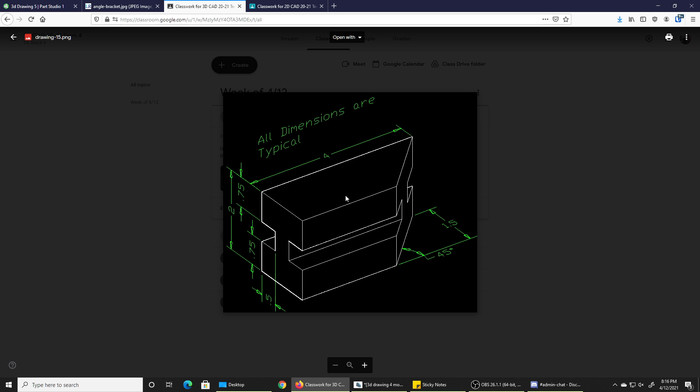All right, this is going to be drawing number 5 in 3D CAD. And you ought to remember it from 2D CAD. We all did it there. And it's not so hard in 3D as you might suspect, given the difficult time some of you had drawing this in 2D. So what I'm going to start with is a basic 4 by 1.5 rectangle, and then we're going to extrude it to 2 so we get that height.

Now I'm going to show you another trick. If I come over here and I start a sketch and it asks for a plane, I'll pick the top plane. I can use this button here to insert an image, and I can go import, and it opens up and it says, okay, where's the image you're trying to import. Once you do, it'll show up in this list, and there's the drawing I'm looking for.

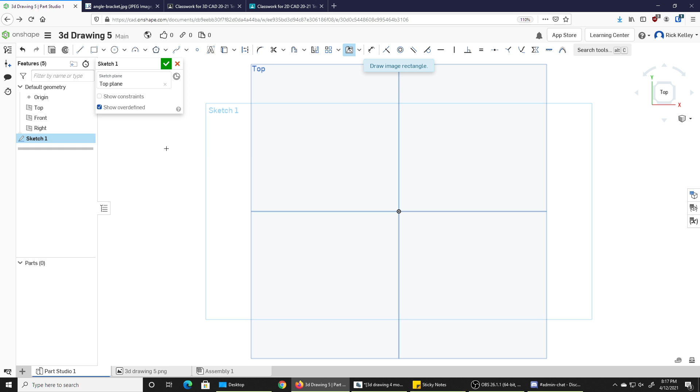Now it says draw an image rectangle, and just like that I can import that image into Onshape and use it for reference purposes. Then you can just grab the corners and drag it around. So that may save you some time going back and forth if you have your image right in here with you. Now I'm just going to draw a quick rectangle.

And actually I'm going to go this way because I'm going to trim off this bottom corner, so I want my dimension up top. So 4 by 1.5. Okay, notice I started at the origin. Everything here is well defined and it's quite happy. Now what I'm going to do is put in the one angled line.

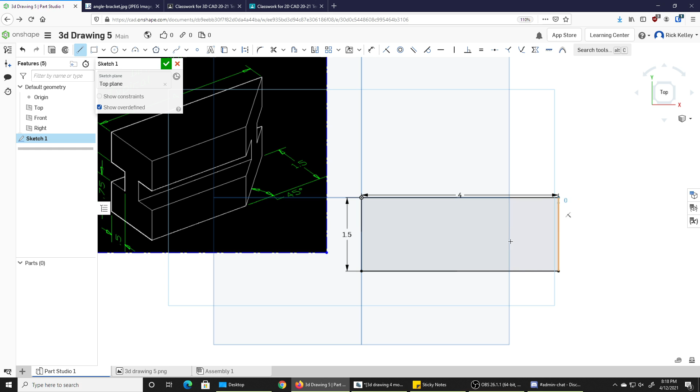So I'm going to grab my line tool and start right there. Come down anywhere on here. Press escape. I do not want a dimension. A dimension would lock that in and it would be black, and I don't want it to be. I need to define that to be 45 degrees. Remember, we don't know what the length of that line is. We don't really care. 45.

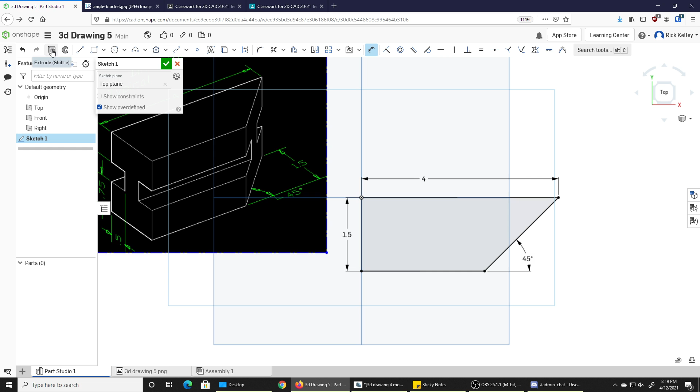Here we go. I might have put that 45 in the wrong place because I got to trim these first. Oh, good, the 45 stayed. But the 4 ended up going away, which is too bad. I wanted to keep that, so let's put that back. All right, everything is fully defined. Now, I could click the green check mark and finish the sketch, then go extrude it. Or skip that step and just click right here on the extrude button while still in the sketch.

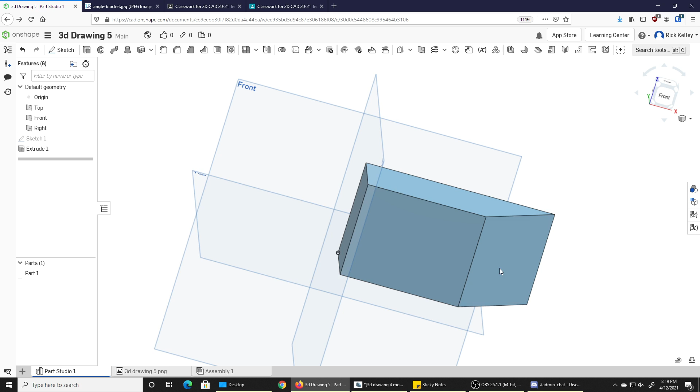It will begin to extrude, and it will ask for a height. Okay, the only height we have left is 2 inches. It's a new object, solid. We're going to hit the check mark now, and you've got your basic shape. Now, how does this get so easy compared to the 2D? Well, you don't have to think about what this looks like in 3D per se. You have to figure out what it looks like on this end.

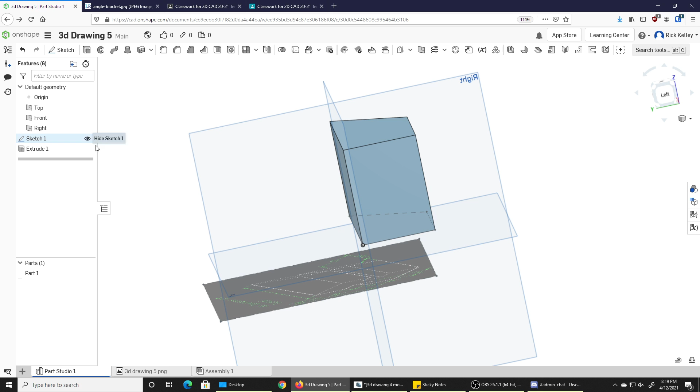The image I put in is now invisible because the sketch is hidden. So I can turn that back on and do some quick references, but it's flat, it's facing the wrong way, kind of a pain in the butt. That's alright, I can make it work. Now at the top end we're gonna come down .75. We're just gonna drop in a line here that goes in 0.5. We're gonna come down another 0.5, and we're gonna come over.

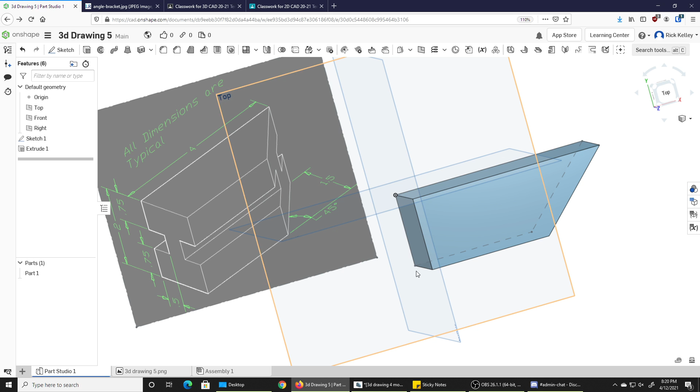How do I know it's another 0.5? Well, because the whole thing is 2 and it's .75 on each side, so that only leaves 0.5. So I'm going to do the same thing on both sides. Down .75, in 0.5. So I'm going to just click on that surface, click sketch, and I am going to draw a line. I'm going to make sure that line is perpendicular, that line is vertical, and that line is also perpendicular. Pressing escape for all of it.

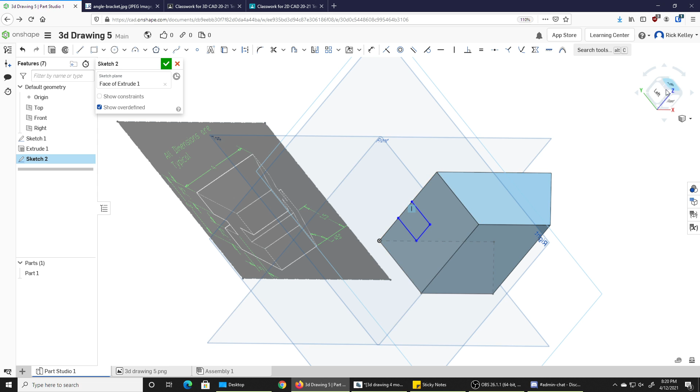I'm going to either go with a left view, or you can right click on any surface you're sketching on and just use the bottom option here, view normal to sketch plane. Straightens it right out. It also partially rotated it for me, which I'm not a big fan of, so let's rotate it back. Okay, now we know our dimensions. The distance from here to here was supposed to be 0.75. Distance from here to here was also supposed to be 0.75. And the distance from here to here is supposed to be 0.5.

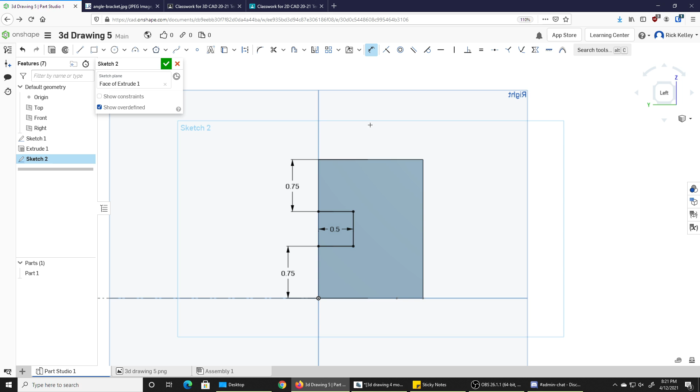We can mirror that to the other side. All your normal sketch tools work. Problem with mirroring is I don't have a midpoint here yet. So let's quickly throw in a line. I'm just going to go into line mode and construction line and go midpoint to midpoint. You don't have to worry about your construction lines messing with your extrusions. They do not get extruded. They get ignored. So now I'm going to mirror. That's my mirror line. Kick that over, and we are done.

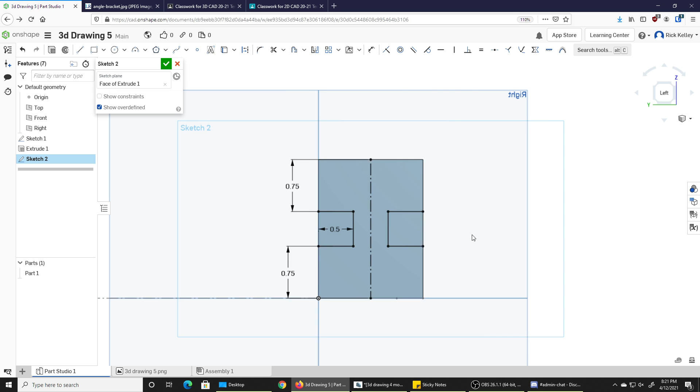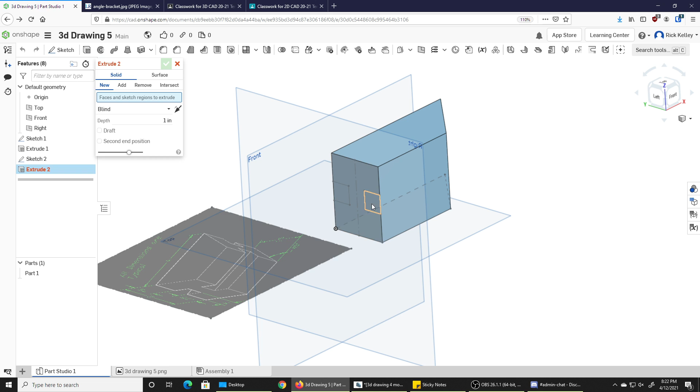How do we make this look completely like that? We just need to extrude these shapes through and remove them. So I am going to click the check mark now because I don't want to extrude this whole thing. That would get ugly. And now I'm going to click the extrude button, and I'm going to click that little rectangle and that little rectangle. Now immediately they want to come out.

I don't want them to come out. I want to remove them. And I want to go not blind. I'm not going to bother measuring this. Just through all. And check. And just like that, this drawing is done.